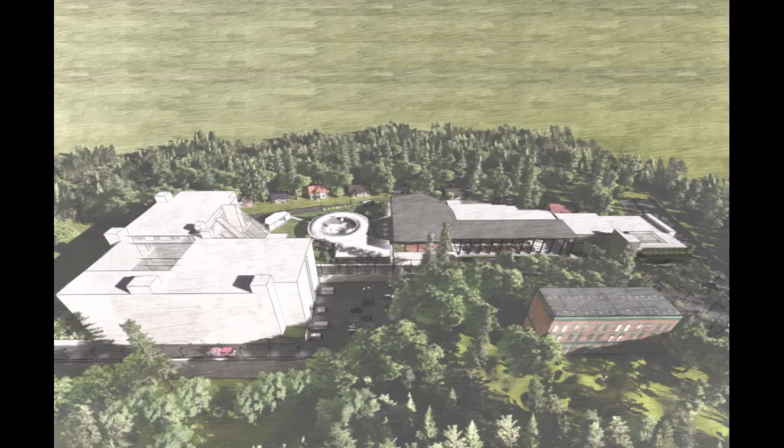The thesis topic I have undertaken is IFFK venue, a permanent venue for the International Film Festival of Kerala at Karyavattom, Trivandrum. IFFK is a film festival held annually in Trivandrum, the capital city of Kerala, India, which mainly aims at the concept sharing of culture. IFFK is one of the important events which needs a permanent venue as it reflects our culture to the outside world. The major project components are multiplex, workshop, open-air theatre, gallery or exhibition space, seminar hall, and bookstall.

The scope would be to create an environment mainly to host IFFK event annually with enough facility and space provided for running a multiplex and to conduct other variety of events like cultural events, movie launch, food fest. The space will be beneficial for film enthusiasts and public, dealing with social, economical and cultural aspects of society. A space that improves social interaction and also acts as a source of income for the government. IFFK is conducted every year since 1996, and now it's about time we provide a permanent venue for it.

One of the main reasons IFFK is conducted in Trivandrum is the availability of multiple theatres nearby, but this also creates disadvantages, such as travel between these theatres. Not everyone comes by their own private vehicles, so transportation can be difficult. There can be delays or cancellations of programs if any one of these theatres faces technical difficulty. Each year, the government has to spend around 6 crores for setting up IFFK, including construction of temporary venues.

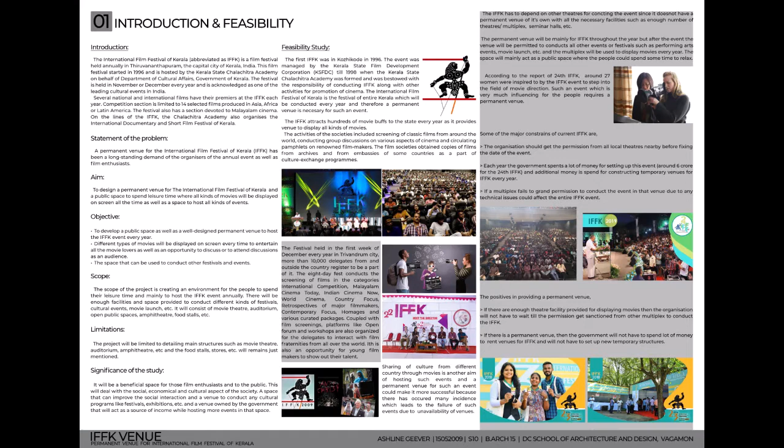In previous years, there have been many issues reported regarding permission for conducting IFFK events in private theatres, and by providing a permanent venue, we can solve this issue.

Case study: Busan Cinema Center, located in Busan, South Korea, is a film festival venue designed with the concept of overlapping open and closed spaces, and public and private areas. The design aims to provide a new intersection between public space, cultural program, entertainment, technology and architecture, creating a vibrant landmark within the urban landscape.

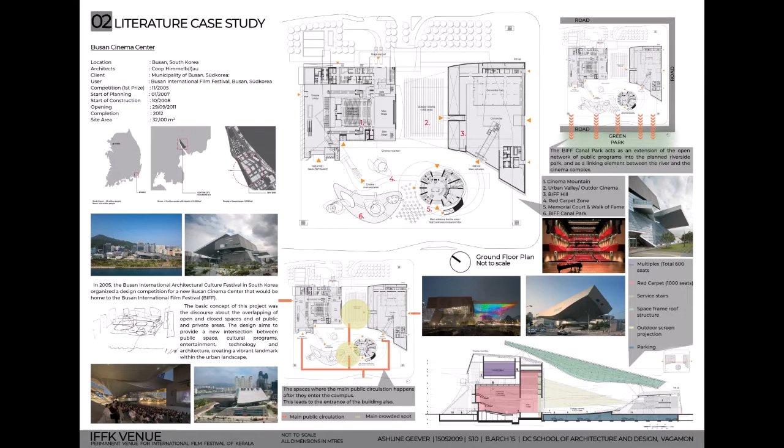It is an open kind of building with a space frame roof and very few vertical partitions. A major crowd activity can be seen near the open theater and the restaurants.

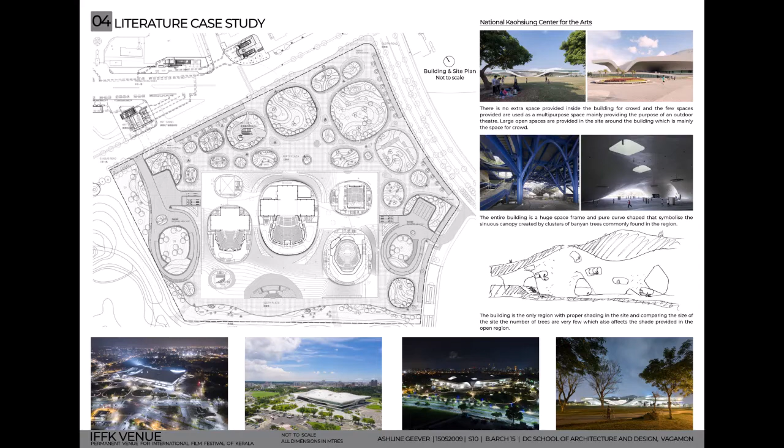National Kaohsiung Center for Arts in Taiwan: the design is inspired by sinuous canopies created by a cluster of banyan trees commonly found in the region. One of the major highlights is the way they have managed the crowd by providing large open spaces.

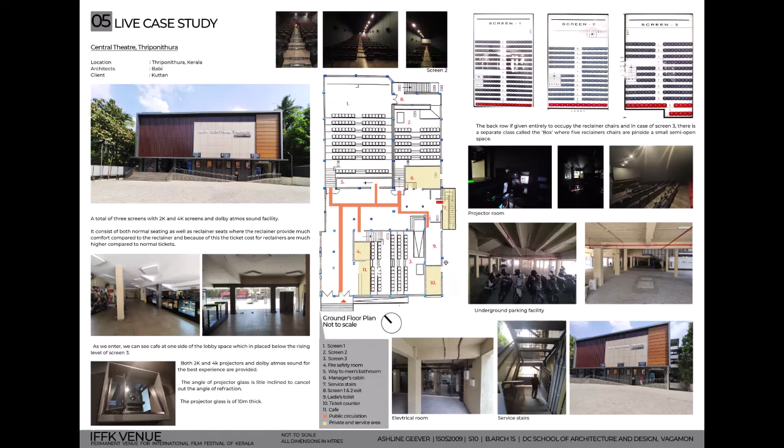Central Theatre Thripunithura: one major drawback I noticed is the very small lobby space and the crowd formed by it. Carnival Cinemas Angamaly: the main crowd is formed in the central lobby, which decreases the crowd formed on the narrow corridors near the screen.

Analysis and inference: a major focus has to be given for handling the crowd. People need space for fun, cheering, thinking, discussions, seminars, etc. The complex should be located in a space easily accessible from every transport hub. When a guest comes to the complex, even before deciding to go to one place, the complex should be leading that guest to each and every venue.

Provide separate guest and service paths everywhere possible. Design the buildings so they can be used for other events or purposes even after IFFK. Provide enough parking inside the campus to avoid traffic caused by vehicles parking on the roadside.

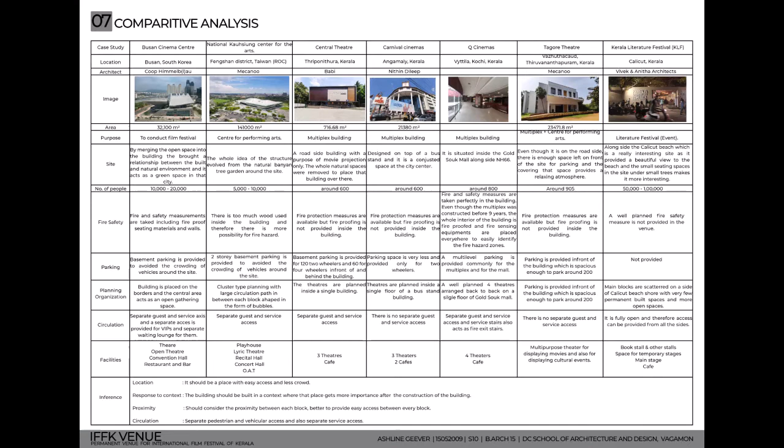Design brief: the design should be able to handle a minimum crowd of 7,000, and hence each and every venue should be provided with enough space to handle maximum guests, along with space for seating, walking, and other required facilities like services, washrooms, etc.

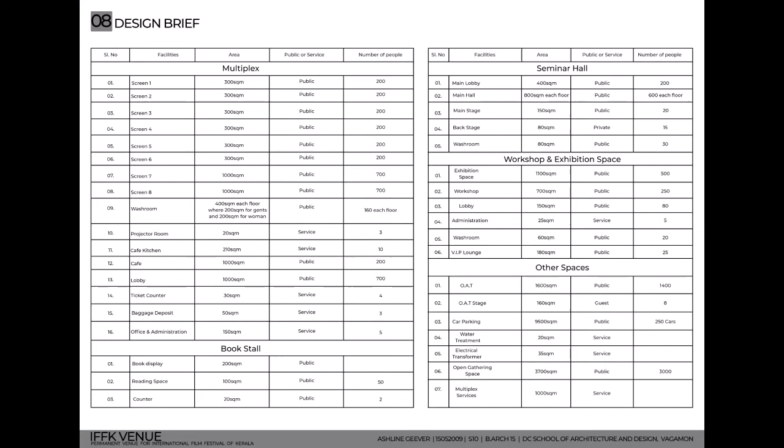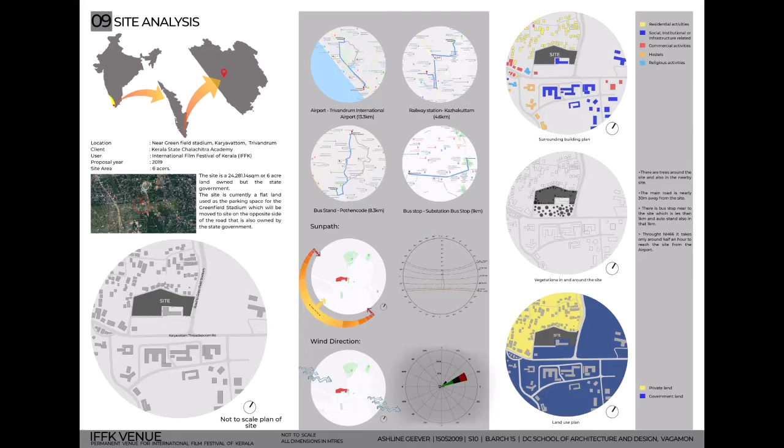The site is in Trivandrum, a district in Kerala, India. The exact location is at Karyavattom, only 13 kilometers from Trivandrum International Airport via NH66. A public bus can drop you at the nearest bus stop, only 1 kilometer from the site, and other private vehicles can come till the front. There is an existing road around the site. The site is a 6-acre land owned by the state government near the Greenfield Stadium on Karyavattom Thirupadapuram Road.

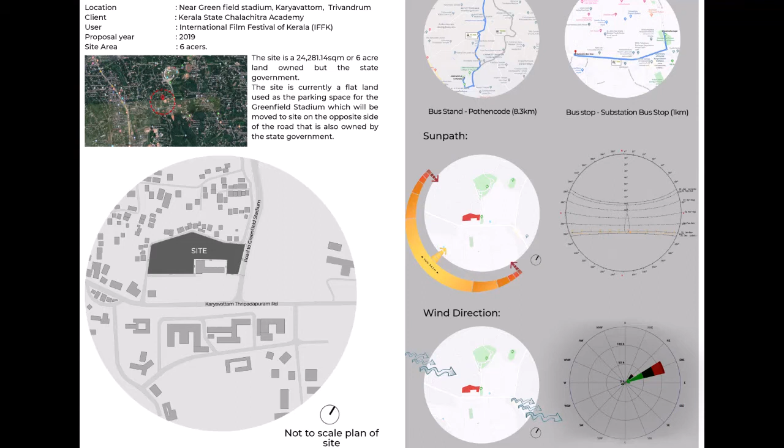The sun path is in the east-west direction, and the major wind direction is southwest to northeast. The site is between the residential and commercial zone. There is a bus stop and auto stand near the site itself. The site has 3 different levels and is surrounded by trees, which act as a buffer from the noise coming from the main road. Some of the nearby buildings are residences, a highway research building, a mosque, Greenfield Stadium and other institutions.

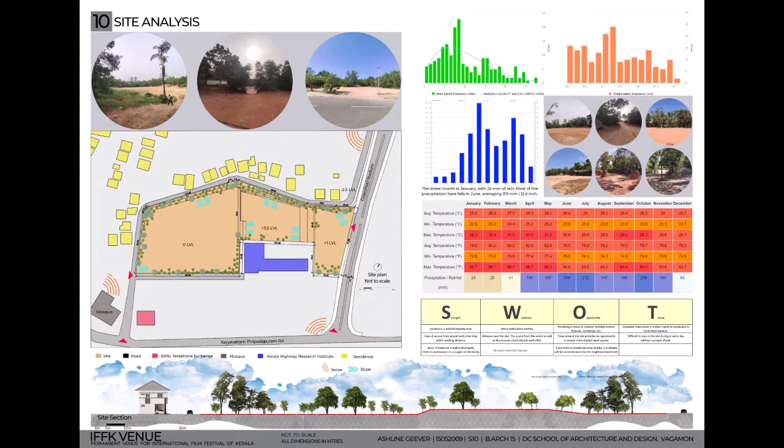Karyavattam is one of the well-developed areas in Trivandrum. There is a Carnival Theatre nearby with a total of 4 screens. There are many institutions and residences nearby, and therefore after IFFK, the venue can be used by these institutions or residences for hosting different events like festivals, food fests, etc.

The main concept of the design is coexistence with nature by breaking the barriers between inside and outside. The idea is to design a shaded space that welcomes nature into the built space by decreasing the amount of concrete or rigid wall separations.

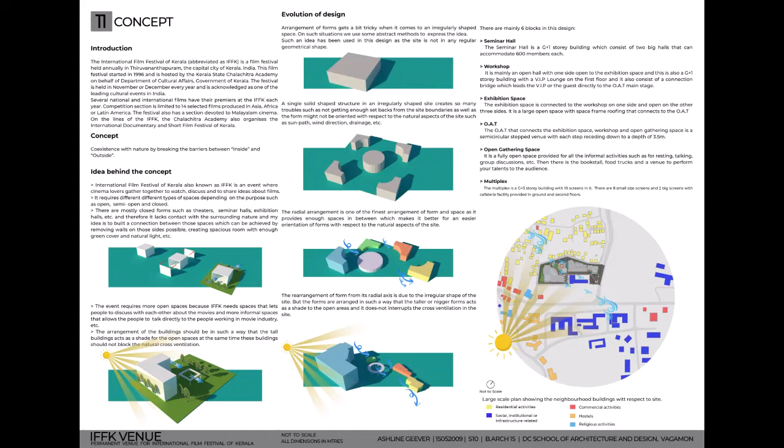Other main factors considered while designing each space are sun path and wind direction. The taller buildings are placed along the direction of the sun path so that they can act as a shade for the open space on the other side. The buildings are arranged in such a way that there is enough space between them for cross ventilation. Another considered factor is the proximity between each space to decrease the collision of service and public access.

From the Karyavattam Thripadapuram road, we enter the road to the Greenfield Stadium, and on the left side comes the main entrance to the complex.

A 12-meter wide main entrance with a security cabin, footpath, and two-wheeler parking on the left side. Some parking is also provided on the right side. The separations are provided using natural objects like trees, shrubs, etc.

Then comes the multi-purpose seminar hall. The road and the stairs from the seminar hall lead a guest to the next venue, which is the exhibition space — an open exhibition space which doesn't have any wall separations, giving the area a spacious feeling.

In front of the exhibition space is an entrance to the parking on one side of the road. The parking lies 3.5 meters below the exhibition space level. The exhibition space is adjoined as part of the workshop building.

After these both spaces comes the open air theatre, which is shaded by a space frame roof. Then comes the open gathering space, which lies over the parking area.

A bookstall is provided on one side of this open gathering space, with food truck facility on the other side, and an open stage provided as an additional venue to make this space more active. There is enough seating facility provided on the open gathering space for reading books from the bookstall or enjoying food from the food trucks.

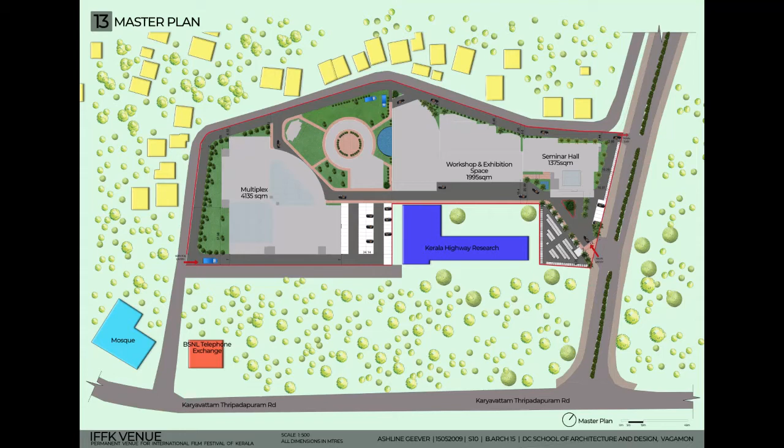There is a road around the entire site, which makes it easier for service as well as for safety purposes. The electrical transformer is provided on one end of the two-wheeler parking, and the water treatment is positioned at the end of the service parking. The entire complex covers a total FSI of 1.25 and coverage of 60%.

The seminar hall is placed on the +1 level, accommodating a total of 1,200 guests. Then comes the workshop and open exhibition space, which is on the +3.5 level, and the OAT, which is stepped down till the 0th level with a seating capacity of 1,400 guests.

Then comes the parking area on the 0th level with a capacity of 245 cars, and the multiplex building with the open gathering space over it on the +3.5 level. The multiplex building consists of 10 screens that accommodate a total of 2,650 guests.

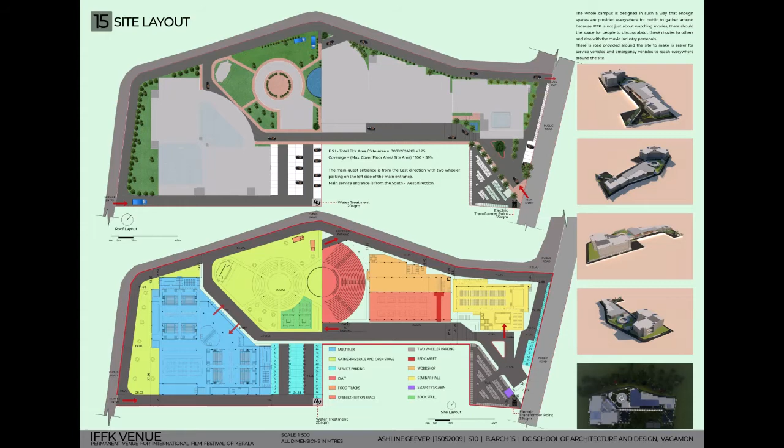Then there is the open gathering space, one of the most active spaces in the entire complex. There is mainly a circular seating space, acting as a resting space for everyone, with a bookstall on one side and a dining space with food truck facility on the other side. There is also an open stage for conducting informal events to make the space more active.

Multiplex: the red arrow marks the main entrance into the building, and there is also an entry provided from the parking. This entrance leads the guests to the ticket counter and then to the baggage deposit.

Then comes the lounge, provided with enough seating capacity, and a cafe space on one side with a seating capacity of 200. There is also a service space alongside the cafe, acting as a service kitchen, and small waiting spaces provided between each screen.

There are a total of 8 theaters on the ground floor with a seating capacity of 170 each, sized 16 by 11 meters with a screen size of 10 by 4.5 meters. There are a total of 6 elevators, 4 for guests and 2 for service, and fire exits are provided at every 25-meter interval.

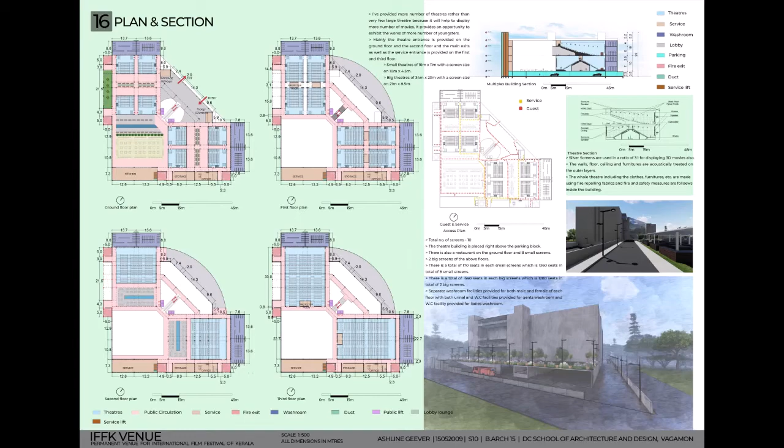Washrooms are provided on both ends of the building, on every floor. The total building height is restricted to 30 meters according to building rules. There are 3 entrances provided on this level for each theater, and 2 entrances on the next level. The escalator and elevators lead to the next level.

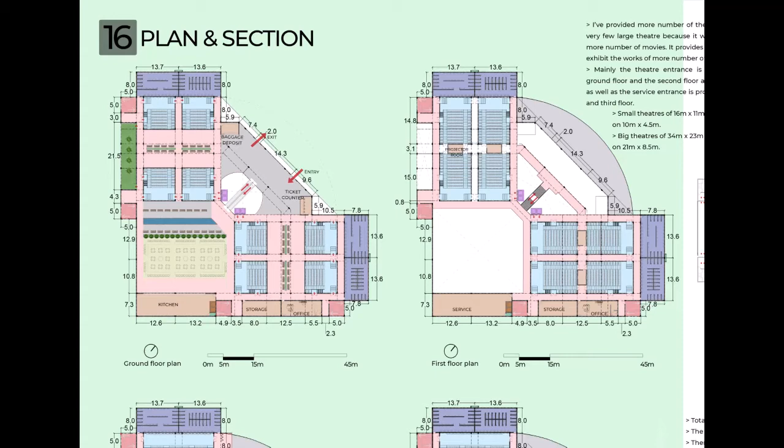On this level, common projector rooms are provided for 2 screens each, with 2 entrances for each of the theaters on this level. A service, storage, and admin block is provided on every floor. The stairs and elevators lead to the second floor, and a separate lobby is provided on this level since the main entrance to the big screens starts here.

There are 2 big screens on this level with a seating capacity of 640 each, room size 34 by 23 meters, and screen size of 21 by 8.5 meters. There are 2 entrances on this level and 4 entrances on the level above. Washrooms are provided on both ends of the building. A 2.5 meter wide guest access is provided around each screen, and each screen has a room height of 10 meters.

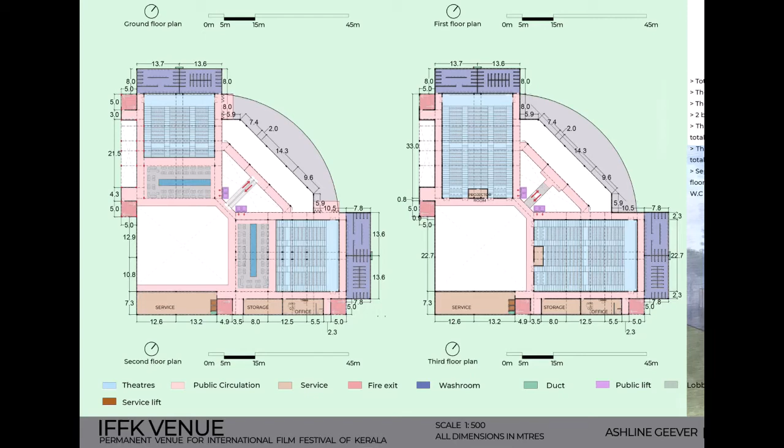Silver screens are used inside the theater for displaying 3D movies as well. The wall, floor, ceiling, and furniture are completely acoustically treated, and the whole theater, including cloth, furniture, etc., is fireproofed as well.

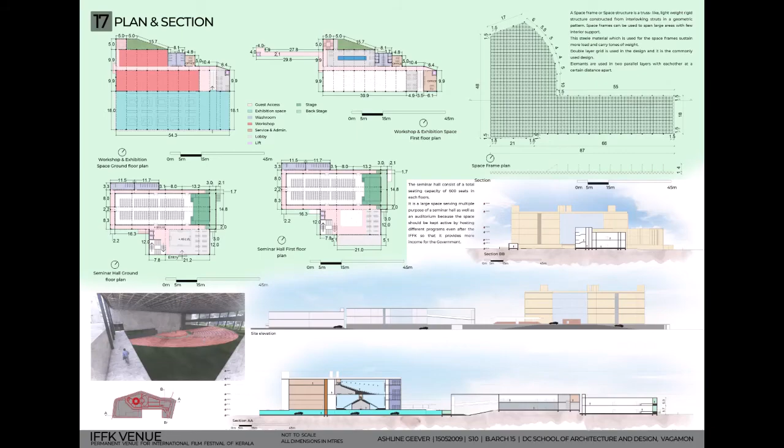Right next to the main entrance, an escalator leads directly to the first floor, which is only for VIPs—a space where they can wait and rest between events. From this floor, a bridge standing on tension support connects to the OAT main stage. It is entirely a private entrance for the VIPs to reach the main stage.

Seminar hall: a space that should serve the purpose of a seminar hall as well as an auditorium. The main entrance leads directly to a waiting lounge with stairs and elevator access to the first floor, then to a hall with a minimum seating capacity of 600 on each floor, with stage, backstage, and washroom facilities on each floor.

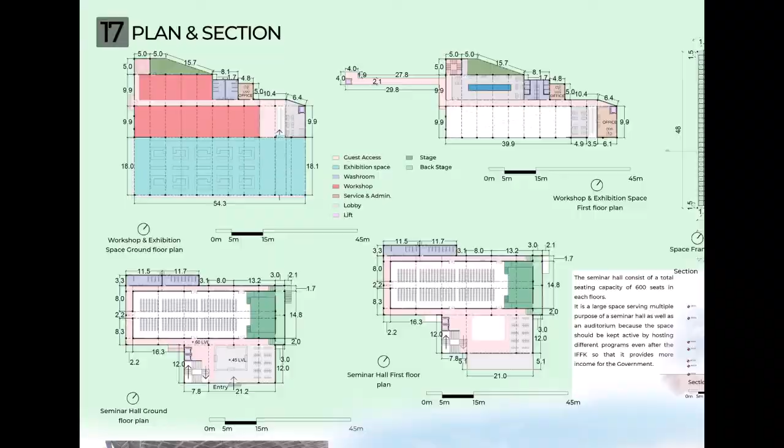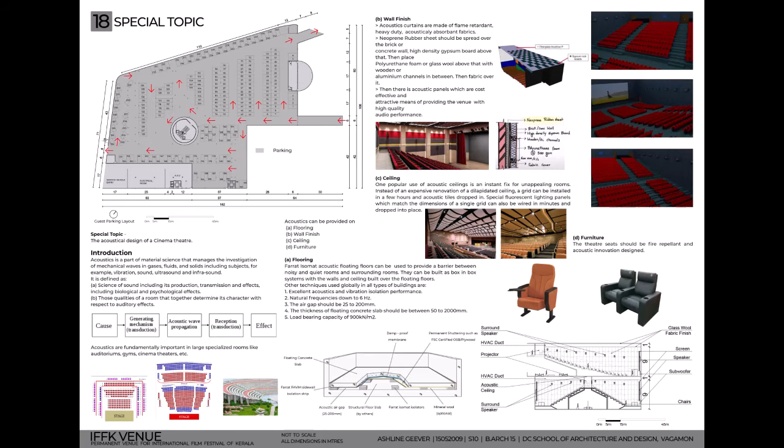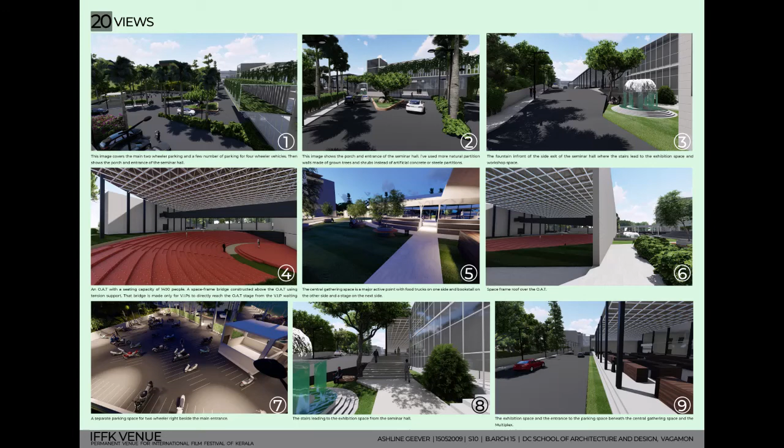Views: the first 3 views on top show the main views we see as we enter the complex. From these views, it's evident that the separations are provided using natural objects like trees and shrubs. There are small interactive spaces provided between each venue, like seatings made by rock cut stones and shaded by trees.

Then comes the OAT with a seating capacity of 1400, and a bridge from the VIP lounge connecting to the OAT main stage. In the OAT, space frame roofs are provided to cover a large span without providing columns in between.

From the main entrance, vehicular access is provided in such a way that the vehicle can reach till the porch of each and every venue.

IFFK is an event which brings together a large number of people with a single motive, and that is to watch cinema. All these people will have different behaviors—some will come to watch the movie alone, while others will come with friends just to have fun.

So it is my responsibility to provide different kinds of spaces for them—different spaces where formal and informal activities take place. Spaces like one where people can sit in groups and conduct discussions, another where a guest can read, an area for kids to play, etc. Another important space is where VIPs and delegates will come together and interact with each other.

And hence, I have tried to achieve all these ideas in my design. Thank you.